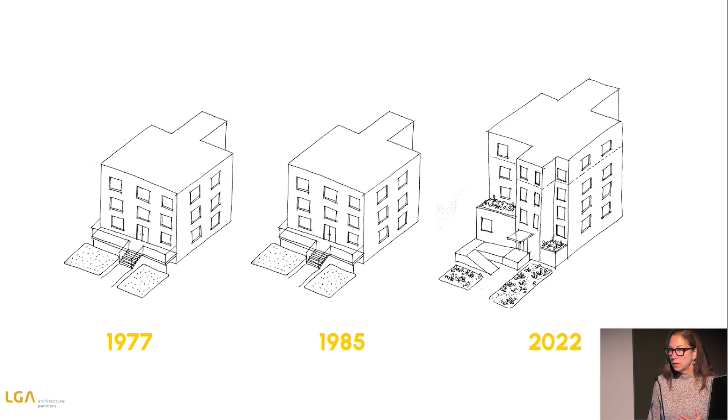What's really interesting is it's custom built in 1977. In 1985, the same architect is hired to do renovations of the interior of the box, but the box stays absolutely the same. Then in 2022, after the PNLT purchased it, we were hired to work with them, and that's the first time there are significant renovations, both to the box itself and to the interior, in a way that isn't just about maximizing the amount of units.

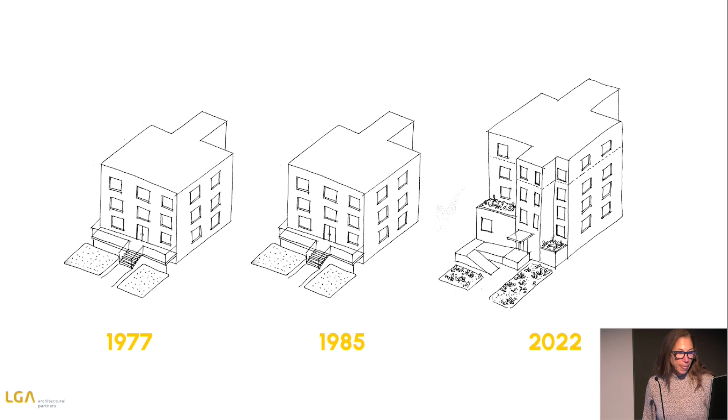So I just want to go through the history of this building, the history of the box, the history of the site. What's really interesting is in 1977 this was purpose-built as a 7-unit apartment, with 2 units per floor across 3.5 floors. The unit sizes were only 2 and 3 bedroom units, ranging between 900 and 1,260 square feet.

So that would be classified these days as upper middle class housing. I don't know if this was at the time, but this would have been pretty conventional housing in the mid-70s. Really interesting, in the middle of Parkdale, this was purpose built, private landlord.

So not a REIT because there were multiple investors, but still a real estate investor. You can see the two units, the blue and the gold.

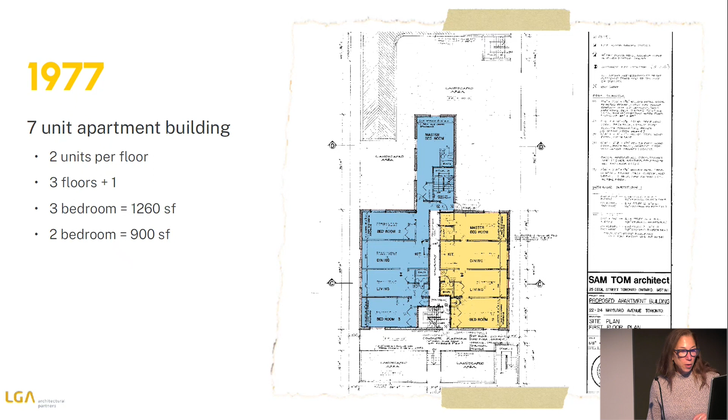Then in '85, the building owner hired the same architect to do an interior renovation, and basically that floor went from 2 units per floor to 9 units per floor. Each apartment became a bachelor, identical, about 230 square feet each.

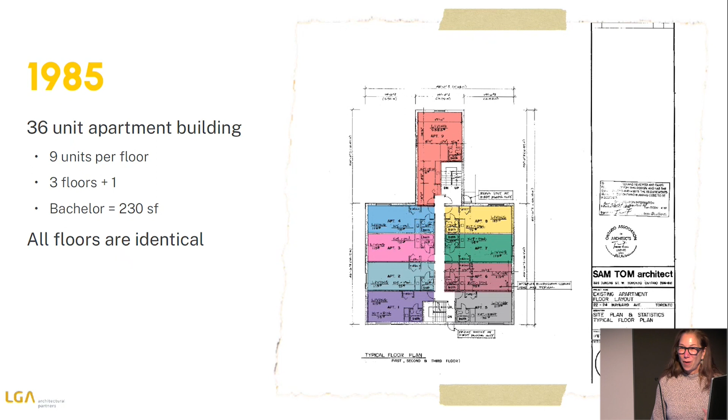We were talking before the presentation this evening, and it's really interesting - I don't have an answer yet about what were the external pressures or influences in Parkdale at that time that made it more profitable to go from 2 units of 2 and 3 bedrooms to 9 units of bachelor apartments. I think there's a really interesting story there, and it's part of the story of this kind of neutral box that becomes a reflection of bigger issues.

Then in 2022, we're working with Monica and her team at PNLT, and we went from 36 units to 45 units, and that was achieved by adding a 4th floor.

We kept the same number of units in the existing building, but on the 4th floor we were able to add barrier-free units. None of the existing units were, so we already get a kind of bump from an accessible perspective. And again, it's not just people with mobility issues, but say parents with kids in strollers that need an elevator. There was no elevator in the building.

It was a walk-up, 36-unit walk-up building. We added an elevator. We upgraded all of the existing apartments to make them function better as bachelor or single occupancies. We enhanced all the amenity spaces.

There was nothing like a landscaped front area, no ramp to get into the building, no mail room - all the kind of basics that you would expect in an apartment building. It had been there in the existing building, it had all been there. But when it was renovated into bachelors, all of that had been removed to maximize the bachelor units.

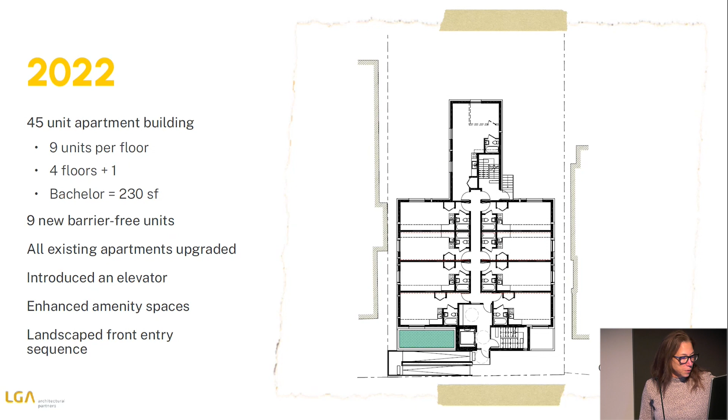So that's the rooftop unit. You can see it's just a mirror image of the floors below.

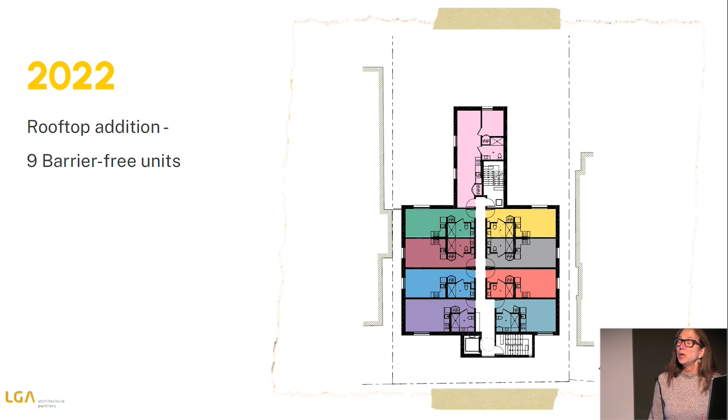This was as much a reflection about the constrained finances that PNLT has to do these projects. But again, it's also a reflection that this kind of unit can serve their public well - or rather, the community well. It doesn't serve all of them, but for some of them, this is totally fine.

And then the other thing that we did, because it's a land trust and there's an investment in long-term housing stock and long-term amenity of your experience living there, is there was real design work to try and figure out how to make these units function really well.

Not only in terms of having a flexible unit, but also investing in the knowledge of things like - well, you don't want a bar fridge in a bachelor unit because then the resident has to buy really expensive single serving meals. You want a full size fridge so they can buy bulk sizes and actually make something that's more affordable.

There's a lot of attention paid to the coordination so that everywhere you look in the apartment, there aren't miscellaneous bulkheads and all the things that you might see actually in a lot of condos. So there's a lot of work to make it really comfortable and pleasing.

And then we worked out a really good barrier-free unit - again, not things that would have happened in the sort of '85 renovation.

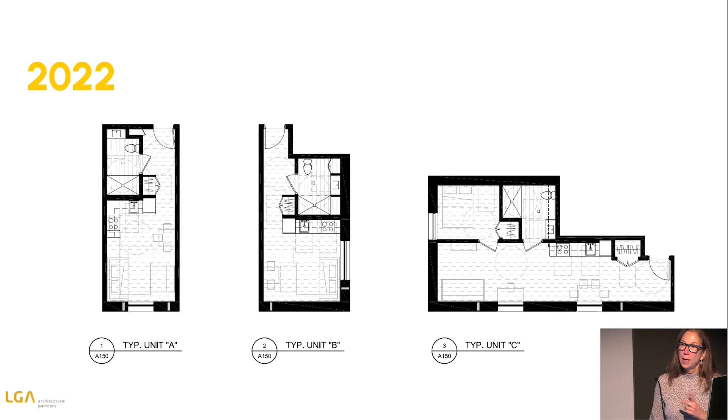And then a lot of work, the main work architecturally from a design perspective was in the front. So we had developed two options with PNLT, two ways to add on to the building to increase the accessibility, to increase the amenity, and to really augment the experience of walking along the street and entering your apartment building and making it respectful and enjoyable, which is really important.

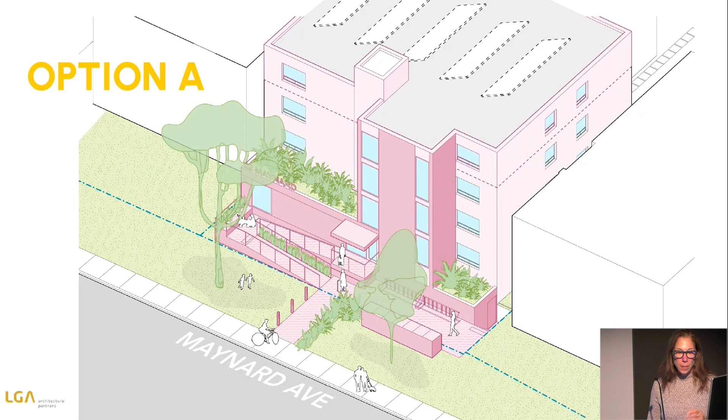So a lot of it has to do with landscaping, has to do with adding a ramp - not just a ramp that's the most utilitarian, but one that has generosity to it. And then we added, as I said, an elevator, a mail room, all the things that really make it work well.

And then the line at the top floor is where you can see the rooftop addition. And then there's a separate idea about an energy agenda. We're hoping to put in solar panels on the roof and make it function better. We're also going to change all the windows and insulate the building, which will reduce the energy costs, operating costs, and the operating carbon.

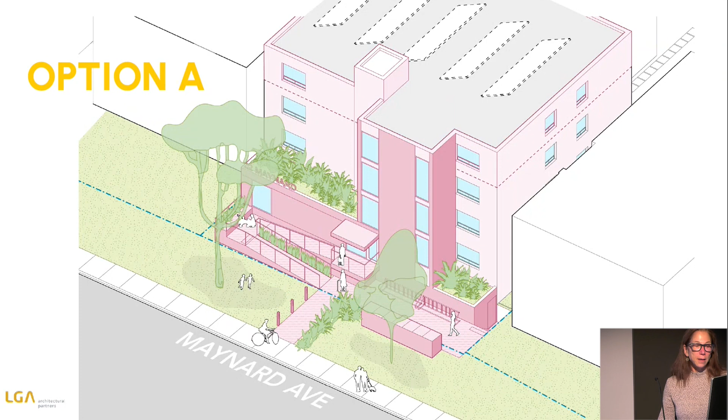So this was option A, and that was option B. In the end, we went with option A because adding that little bump at the front provided a significant increase in the utility of the building and the experience as a place where you could actually live longer term, because it had a generosity to the entrance. You could actually have a place to put your strollers, a place for storage, all those kinds of things.

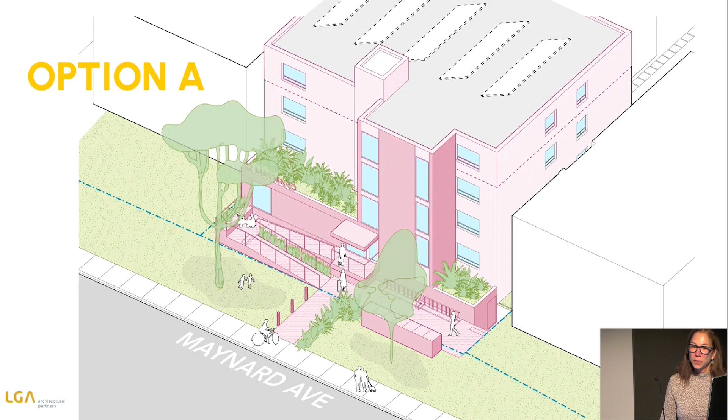And that's the end of the presentation. It's brief and small, but I think the ideas are the big ideas. Thanks.

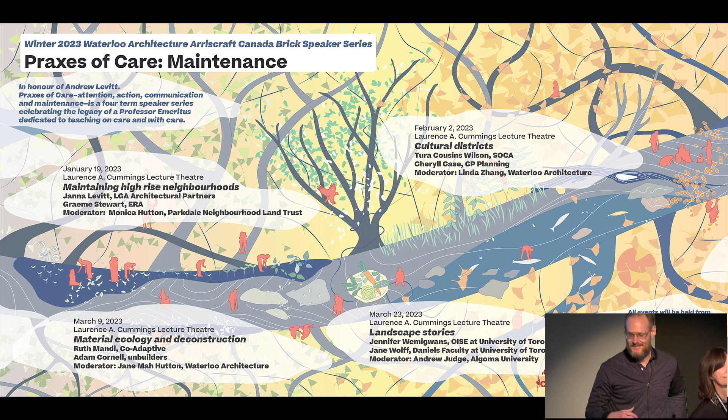Thanks, Janna, and thanks everyone for having me. It's a real pleasure to be here. It's great to see some colleagues, some familiar faces, and some faces I haven't seen in a while. The theme is perfect in terms of the work that we do and the type of things that our practices together take on.

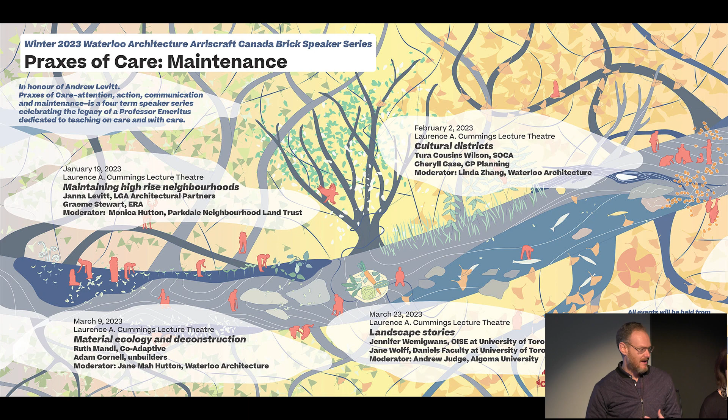The idea of care and maintenance is really a different ethos. It's interesting that we're now at a moment where ideas of care and maintenance, and looking at what we have, have become so topical and important, where I think it's been quite a fringe issue, in many ways seen as secondary compared to flashy new buildings. But more and more, the expertise required to deal with our existing building stock is critical, for all the reasons we know: the climate crisis, the housing crisis, all the compounding crises we're tackling. I'm going to provide a broader overview of some of the big policy pieces we're looking at, and then a few case study projects, and look forward to jumping into the Q&A.

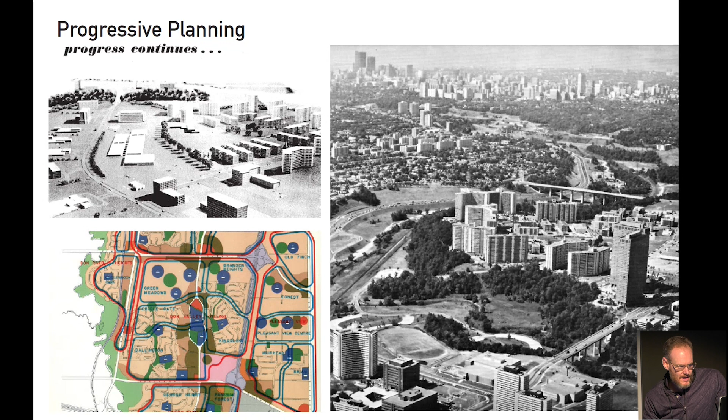A lot of the work that my practice focuses on, and that Janna's practice focuses on, is really this era of housing. A lot of the work I did as a student with Adrian and others was digging into where this came from. Why is it that Southern Ontario has a remarkably robust legacy of this type of housing, with big projects, big thinking, big capital-P planning, in a way that's simply different from how other comparable urban regions grew? If you look at San Francisco, Philadelphia, Dallas, Houston, Atlanta, you don't see this. This is completely bespoke to the Toronto region, but really Southern Ontario and beyond. You see it across the country, and there's a whole bunch of reasons for that — that's a whole other lecture, but we can talk about the different parts to it.

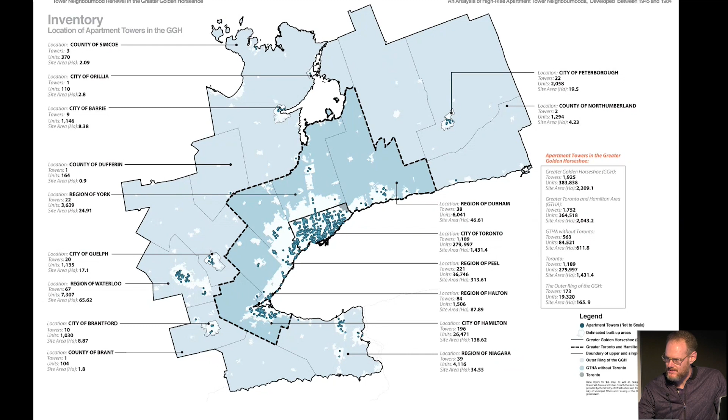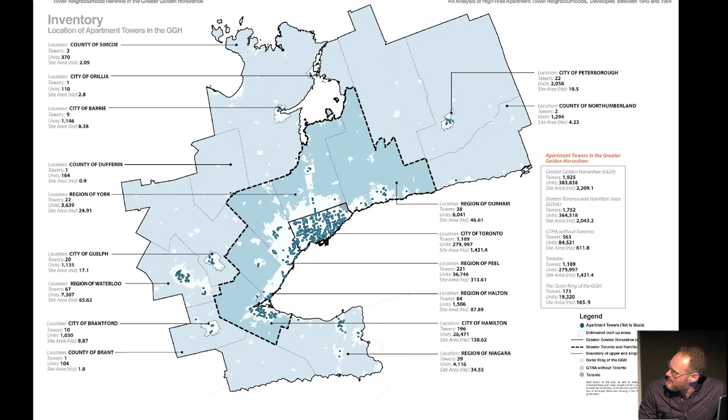A lot of our practice has been doing the bean counting to understand this — how do we understand the place we live? Where are people housed? How are they housed? Who's housing them? This is a map we put together for the province of Ontario about 12 years ago, and it was the first time there was really an accounting of all these types of buildings, these legacy towers. We found 2,000 of them in the Greater Golden Horseshoe, which includes where we are today.

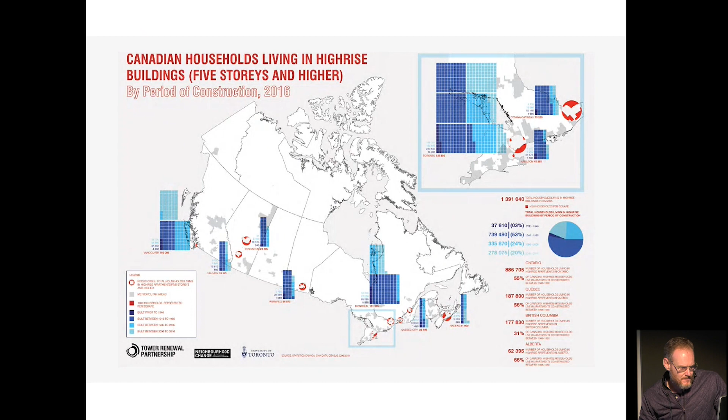Beyond that, with later work with StatsCan and others, we found a huge supply of this type of housing — high-rise housing across the country. We found that even with all the condo booms we've had, more people still live in housing built in the 60s and 70s than in all the condos we've built today. It was an extraordinary housing boom. As many people know, this legacy housing is in many ways at the end of its life, so we're at a crossroads of how do we reinvest in this housing — we certainly can't lose it.

If we don't have that standard of maintenance and standard of care, there will be disasters. This is the disaster that happened in a building on Parliament in Toronto, and St. Jamestown, where because of an electrical fire, over 1,000 people became homeless overnight, and they weren't able to come back to their flats for 18 months. That one building put so much pressure on the housing system that the mayor had to put people up in motels, and it was all over the news a few years ago.

That was one building. What happens if 2 buildings go down? What happens if 10 buildings go down? We don't have the flex in our housing system to address it. So it's absolutely critical that we find solutions.

The other thing we can't do is this, for a whole bunch of reasons. Right now there's a real discourse around embodied carbon, but also the fact of embodied housing. You don't want to lose the housing that already exists.

That's been a lot of my work over the last 15 years or so, and I've built a really great coalition that includes a lot of people in this room, to figure out how we move this forward with all different parties and partners through the Tower Renewal Partnership. The broad set of ideas is: let's keep what we have, let's value what we have, and then how do we optimize it through different forms of investment in the fabric of the buildings and the lands around it.

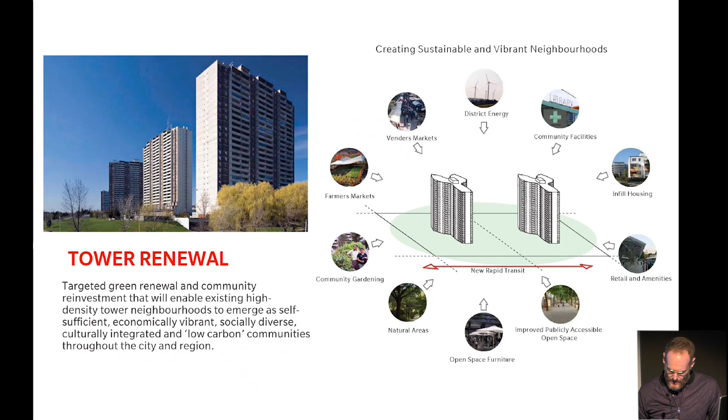Really looking at building maintenance for deep energy retrofits, but really for comfort and health, improving the social and economic life around the buildings, and then neighborhood transformations, with new housing and more housing where appropriate.

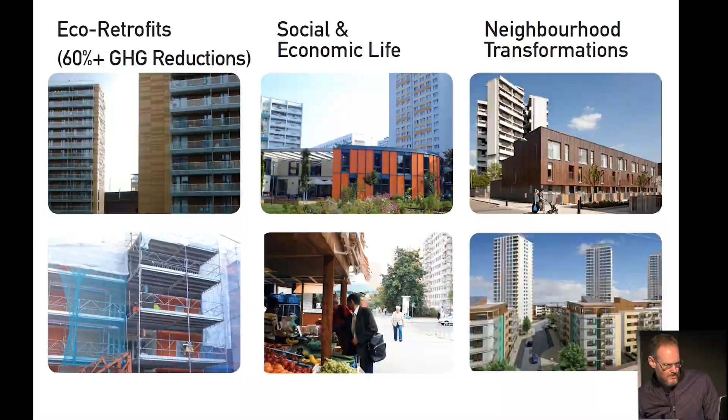One of the early wins, about 8 years ago or so, is we worked with the United Way, Toronto Public Health, and a bunch of other groups to liberalize land use in a lot of these tower neighborhoods, because not by design, but just by practice, they were all single-use zoned as residential, which means if people wanted to open a small business or do modest things that we all know make our neighborhoods grow, they weren't technically allowed to. Landlords, being conservative and their lawyers telling them what they would tell them, were suppressing a lot of that activity. So we were able to get consensus from the city to do a citywide rezoning.

We rezoned about 500 sites. The argument we had to make is that in a new condo, the city mandated that level of flexibility, but in older apartments it was technically non-conforming. So there was just an asymmetry, and to make that happen it took a lot of work, getting it through committee, doing all the political work. This was during the Rob Ford years, so it was an interesting time at City Hall.

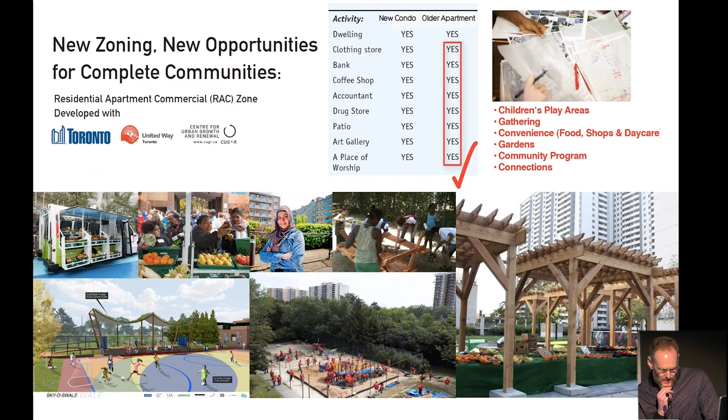But what that allowed for was they were suddenly working with NGOs, working with community groups like FoodShare and others, to be able to have all these interesting things happen on these parcels.

This is some projects we were directly involved in, working with youth to reimagine parking lots and underused areas. This is in Thorncliffe Park, where the Thorncliffe Park Women's Committee worked to put on these amazing nighttime bazaars that a lot of you have probably been a part of.

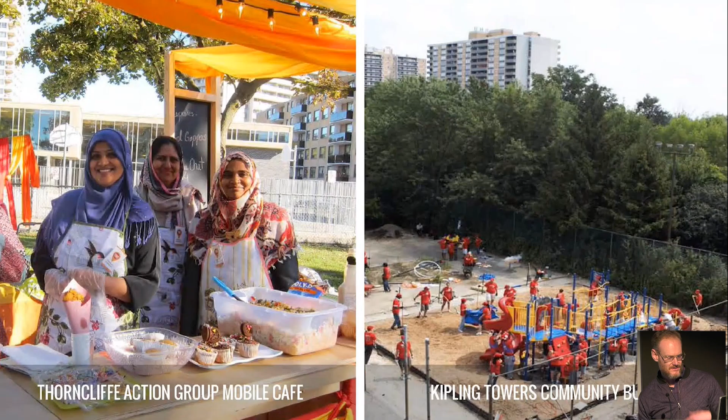This is a group we worked with, designing modular furniture so they could set up this pop-up bazaar and then store it in their building. And then it began to expand and take on new forms.

This is a project where we were able to get a new daycare on a TCH site using this new zoning, where we didn't have to go for site plan approval and didn't have to do a rezoning. So that was just as of right, using it to be able to do something, which was really fabulous.

We worked with SVN Architects as partners on that.

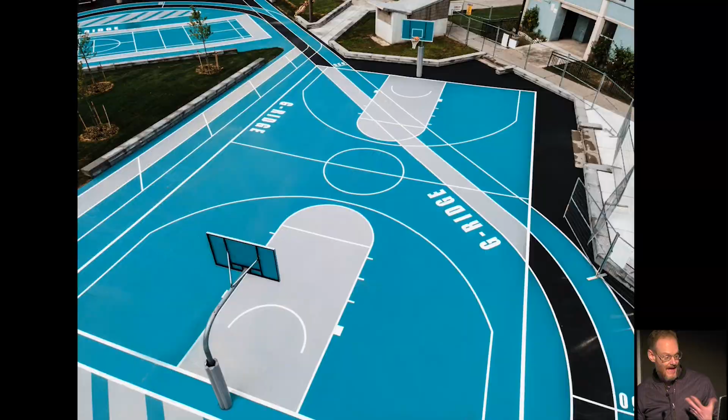This is one that we completed with our chief landscape architect at the office who led it. It was with Toronto Community Housing and a grant from Toronto Maple Leaf Sports and Entertainment. We designed this with the kids, and when it opened, the Raptors came and everyone had a wonderful time. But it was also about taking something that was a really underused asset and turning it into this multi-purpose landscape.

It's great to see these types of things happening as these aggregate pieces, and there's lots more to do. But the big hurdle to getting that going was to change policy, and that took several years of pushing a boulder up a hill.

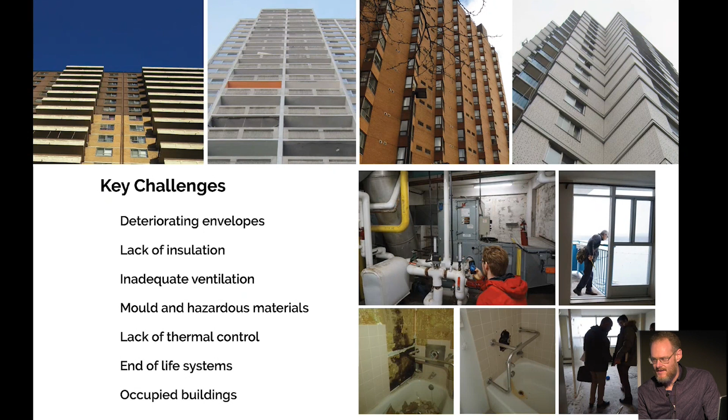The next piece of this is physical building retrofit, looking at these buildings like cruise ships. They're usually made of the same stuff, they have the same equipment, and they're all aging at different rates. The projects we've generally been involved in have very distressed assets, buildings at the very end of their life that have had very little maintenance, and it's a major job to bring them back. Then, in addition to maintenance, how do we make them performative?

A lot of the work the market is doing is around 10% GHG savings from things like changing light bulbs and having efficient boilers. Our ambition was, can we get to near net zero or around there? And what would that take?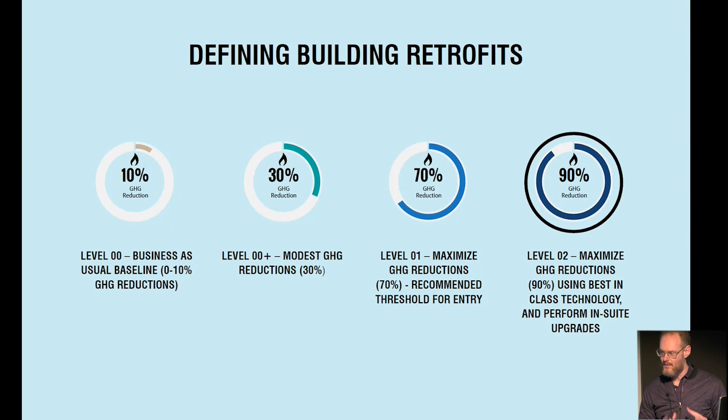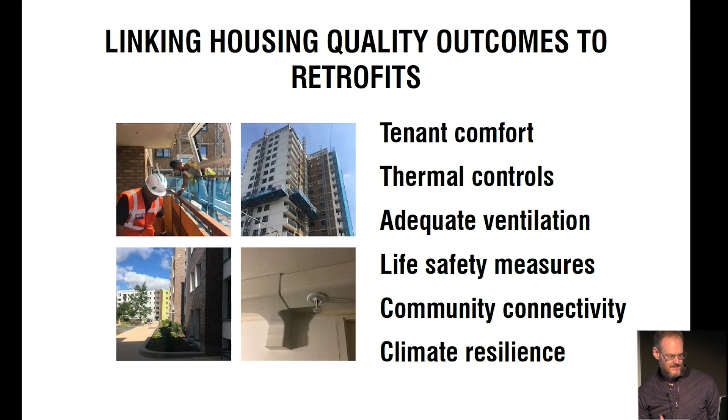And how does that also map onto the really important stuff? There's a real focus on energy. Energy is crucial, I'm a big advocate of that, but as a practitioner I also know you can make a low energy building that's terrible to live in. So you have to make sure it's actually comfort-driven: tenant comfort, thermal controls, adequate ventilation, life safety, community resilience, et cetera. Low energy is a corollary of it being performative.

To bring this all together, you need financing, you need standards for what standard we're engaging in a retrofit, and you need a ready industry that can say, we know how to build this. All three of these things are moving along, and as one moves forward the others catch up. We're not at a point where it's totally singing, but we're much further than we were a decade ago.

I think the standard part is really key. There's very little guidance on existing buildings, so when you're dealing with one it's a lot of professional judgment in terms of what you're doing and to what level. What got this going was first provincial funding, before Doug Ford, to invest in these buildings, which really primed the pump for the first generation of these deep retrofits.

Then came the National Housing Strategy. I'm a little disappointed with some aspects of it, but there really was a promise to invest billions of dollars in retrofit, and some of that has led to exemplar projects, to the point where we're well past the pilot stage. These are projects from Nova Scotia to Quebec to BC to Ontario, and there's an Alberta project too. So this is literally a coast-to-coast example of ambitious housing retrofit projects enabled largely through different forms of federal funding.

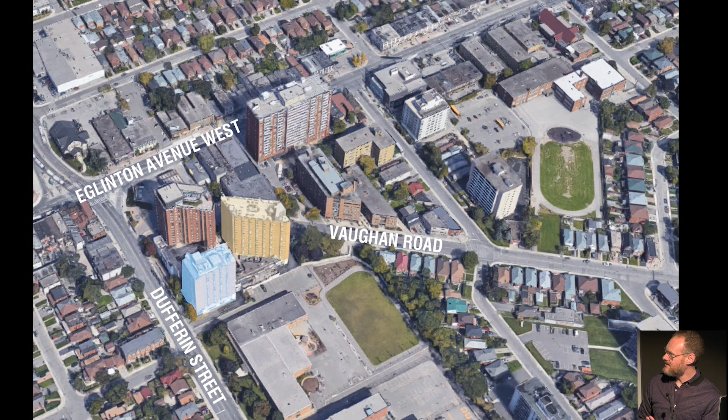And it's, I think, a huge win. This is seniors housing, very similar to the project with the modest units, because it's bachelors for vulnerable seniors, and thank goodness it has stayed in the system.

We went through the process. This is what it was like when we got involved. Some of the floors were completely empty, and the reason was it became a downward cycle: as people left, the units were in such bad shape, they didn't have enough money to fix them, so they stopped renting them, so rent revenues went lower, and so on, until the building was almost empty.

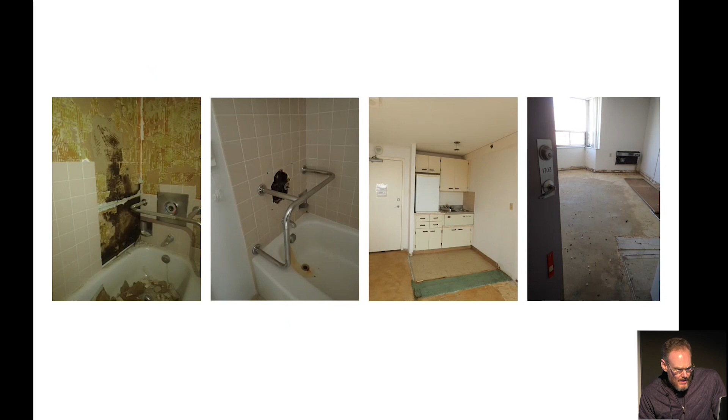I think there was about 30% occupancy when we were involved. So we really looked at this with the anchor funding from CMHC to bring them up for accessibility, and for aging in place. We needed a 30% energy reduction target. It was an electrically heated building, so that was actually quite difficult, but we were able to achieve it.

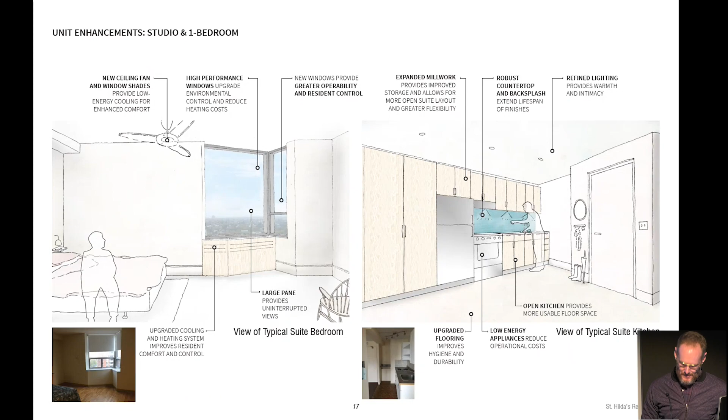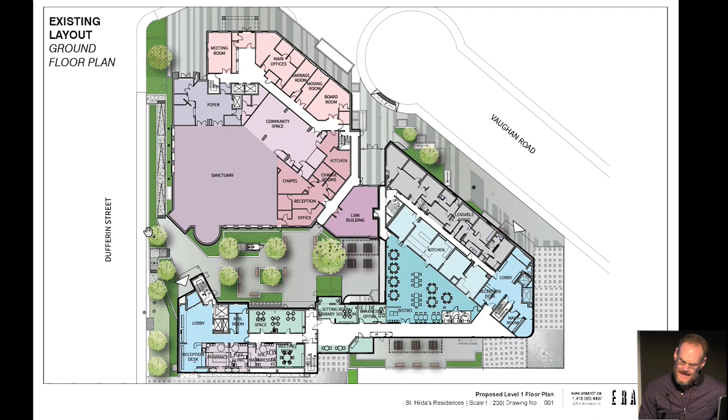And then this is the campus. There's this amazing campus, and there's this real ambition as a next stage to build a community hub, and to work with the city to make this, and a lot of the unused space, a focal point of the Fairbank neighborhood, which has a real need for different forms of spaces.

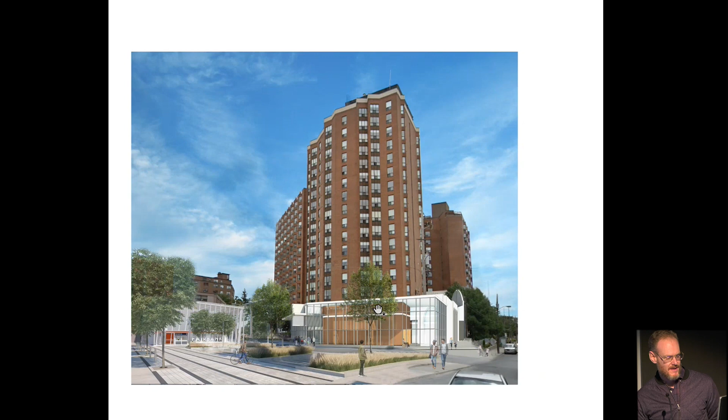This is the new Fairbank station, which is kind of amazing. This used to be a gas station, now it's a plaza. And the next phase is, how does it become both a community hub and retail facing that station?

And then this is the gang. This is the board who we meet with weekly. And this gentleman here really had the vision that kept this affordable, and was able to bring these partners together.

Next, what I'm showing is more of a project management thing, but this is what it takes to take a project that's over 5 years and figure out this rolling way that you're finding funding, getting approval, and making it happen.

These are the types of project plans we have to put together in terms of pre-design, the usual pieces you do as an architect, but then tying it into the different funding streams and funder requirements. If you have 4 or 5 funders, you have to meet those requirements through different reporting, which may be asynchronous, so there's a lot of work as a practitioner to bring this all together to make a project like this happen. A lot of balls in the air.

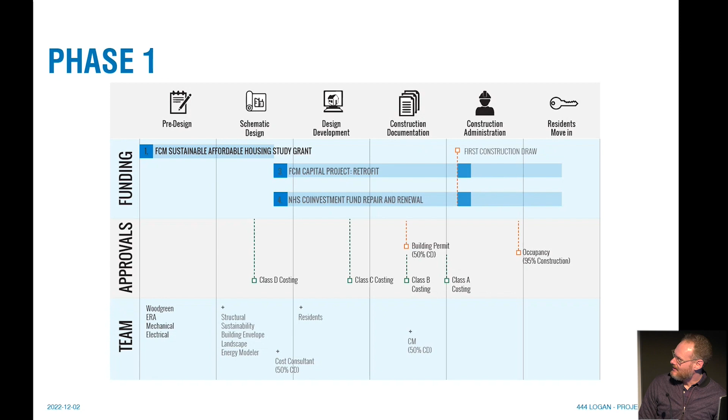So that would be phase 1, and then you have phase 2, and they stack, and then if you bring in phase 3, you have to bring this all together. A lot of it is not just being an architect in the traditional way, but also being someone who can organize a project like this and bring it to a client who can access that funding stream, or other parties who could be a partner in it.

I would say that we're in an amazing moment where there's such a focus on housing. There is funding out there, and in our experience, it really is the nonprofits, municipal or private, who are the real leaders and innovators.

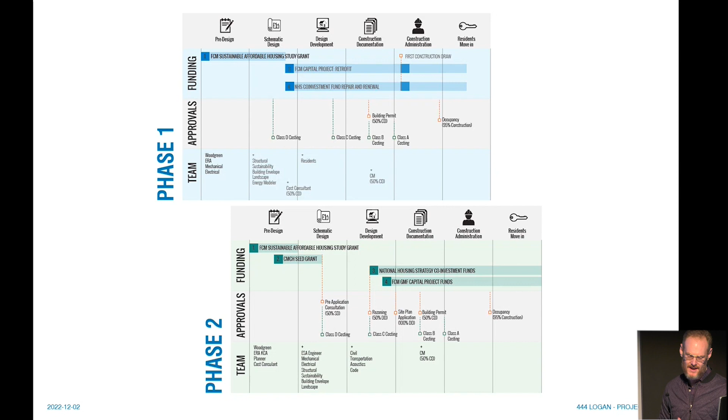The private sector are laggards in this. They are not meeting the same energy targets. They are not doing this type of deep retrofit. It really is the nonprofit sector who's leading.

And then this gets into the next project, which is the Ken Soble Tower in Hamilton, which was about five years of the team full throttle on this, in a really similar way, where it wasn't just the design of the building, it was the design of all of the ways that we were able to make this project happen. It was built in 1967. It was a centennial project. And I think what's kind of amazing about it is...

It takes leadership, and it takes, I would sort of say—I wouldn't want to say it to the face of our clients—but it takes a certain amount of irrationality, because the people taking these projects on have such a vision and are taking risks, and they believe in this work. It's highly risky because they're doing these new things, but you need that level of risk taking to do something amazing.

So Tom Hunter was the CEO of City Housing Hamilton. He's now moved on to be the CEO of Toronto Seniors Housing. He's an amazing guy—his background is healthcare. So he came from a healthcare background, became CEO of a housing company, and he said, I've been part of building world-class hospitals in Canada. Why do we have absolutely appalling housing?

So his goal was to modernize Hamilton City Housing, so that their entire stream of new builds—and they've got about 4 or 5 underway now—would all be passive house standard, because he was convinced that was the best standard to work with. And this project, their first retrofit project, would also meet passive house standard. So we were brought on to meet that challenge, and that was a challenge we were very excited about.

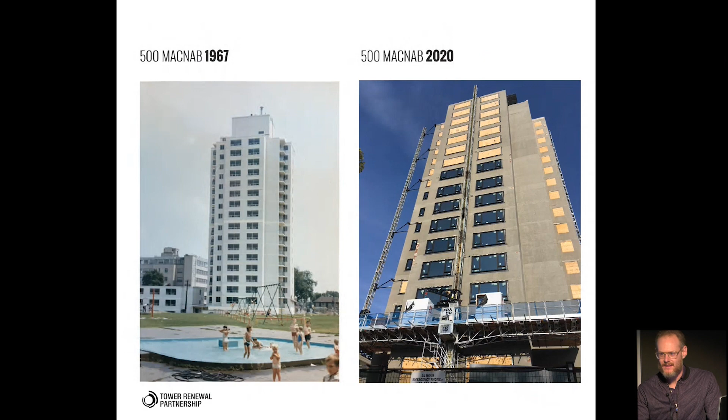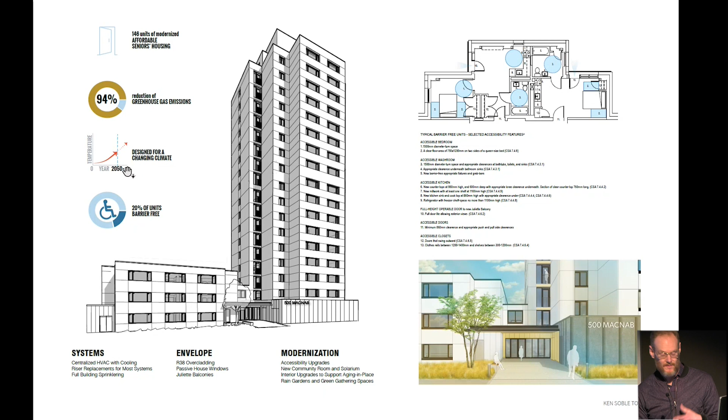And so that was the mandate the CEO got, and we were thankfully able to be the ones to bring it to life. The mandate was 94% energy or GHG reductions, converting 20% of the units to fully barrier-free. And we modeled it on 2050 climate data to figure out how we keep this place comfortable as we get much hotter and much more humid moving forward.

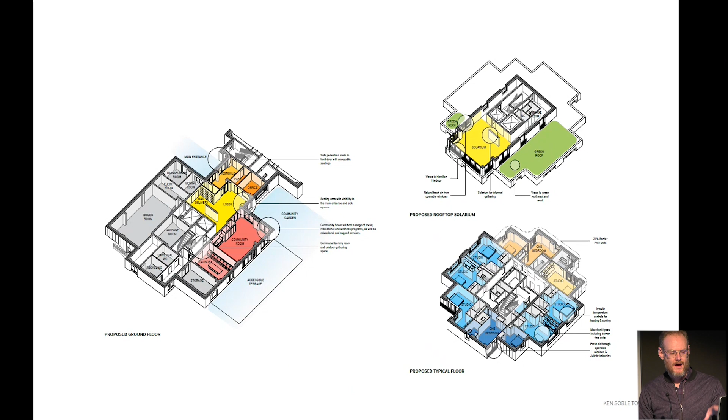We did some modest retooling of some of the common spaces—we didn't do any additions, it was all just working within it, but with the idea of aging in place in mind. This was not originally purpose-built as seniors housing, so that became its new life.

Jen, I'm sure you're familiar with these, where you have to go to your funder and prove how you're doing it. What's interesting is there are about 3 or 4 standards you need to meet that all go well beyond the OBC. So through this, it's great to say it's not just about a wheelchair radius—it's about all these other issues of aging in place and general accessibility as you're doing it.

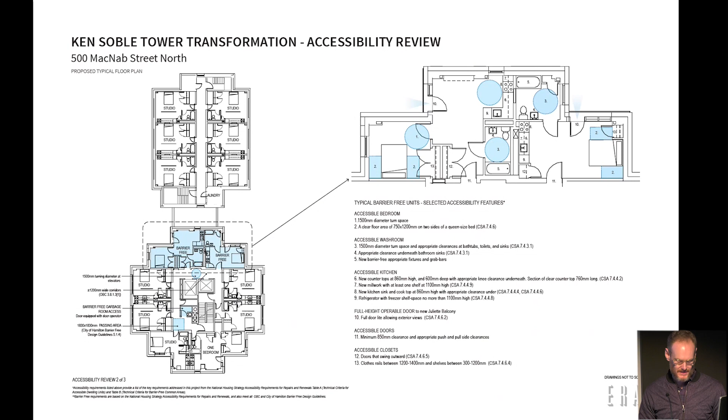Doing it within the confines of a concrete building is very difficult, so this was major surgery. In the units that we made barrier-free, it looked like this.

What you can also see is fully new plumbing risers. This is new direct fresh air being brought into each unit. So this is a complete asset renewal, which you can only really do in an empty building.

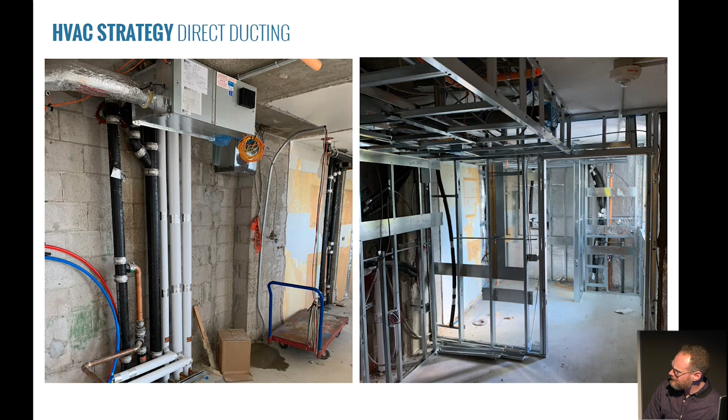These are the little studios. These are all the compounding set of issues. Some of them are remarkable. When we took the drywall out to do some plumbing work, we found out that it was Swiss cheese between the fire barriers between units.

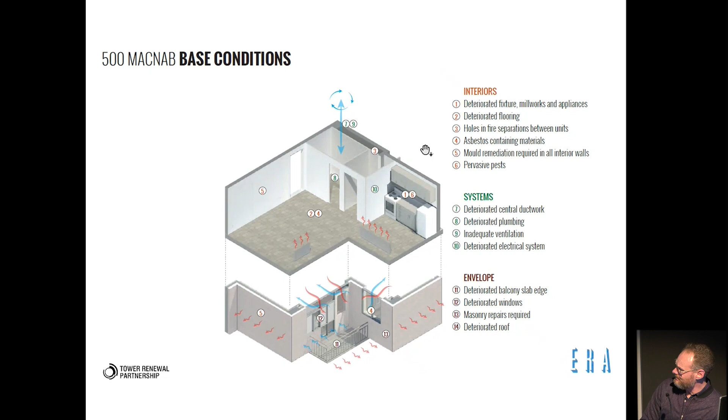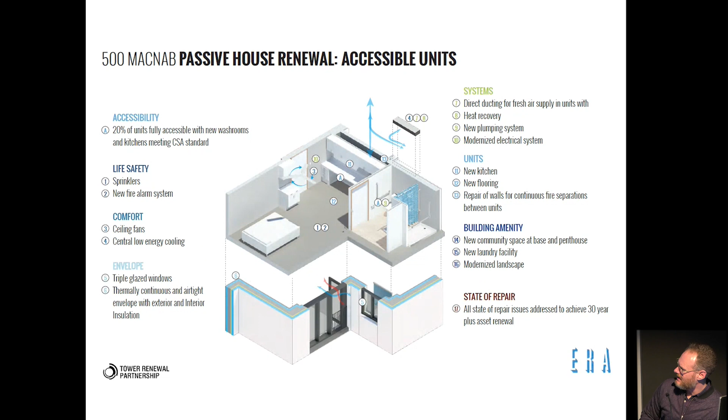So those all had to be fixed. And so this is what it looks like afterwards, a winter coat on the envelope, passive house windows, new ventilation systems, new finishes, et cetera. And then this is the kind of twisting around where the kitchens and washrooms were for the barrier-free suites, to make that all happen.

So this is what sort of the end result looks like. Very pleased with how this turned out. It's fully occupied now, going from a building that was providing zero housing to a building that's providing 150 flats to people in need.

The other piece about it, which is really interesting, was ventilation and some of these issues around health and comfort. So we insisted that the building be sprinklered. After the Grenfell tragedy, you have to have adequate fire suppression in these buildings. Thankfully, the client agreed. The other thing was we really proposed a best-in-class ventilation system, because all the evidence says these buildings have really poor air quality due to migration of things going through the buildings.

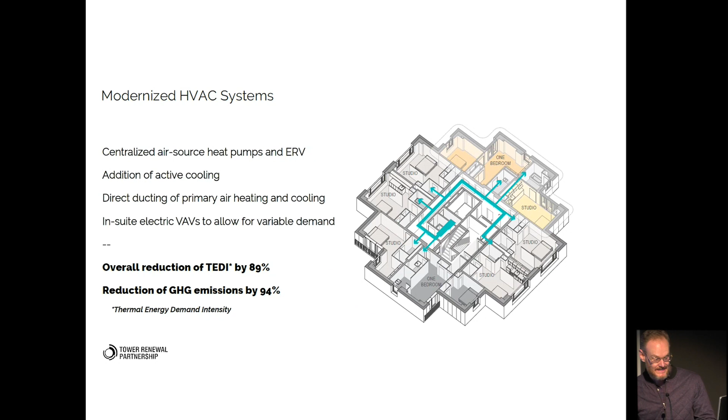And thank goodness we did, because this was designed pre-COVID, but the construction was in the middle of COVID. This thing was under construction, and because of the ventilation strategy we took, direct fresh air into each unit, it was able to be occupied during the height of the pandemic, because it met all of the ASHRAE COVID standards, which didn't exist at the time. And then this is just some of the studies you get into when you're doing this.

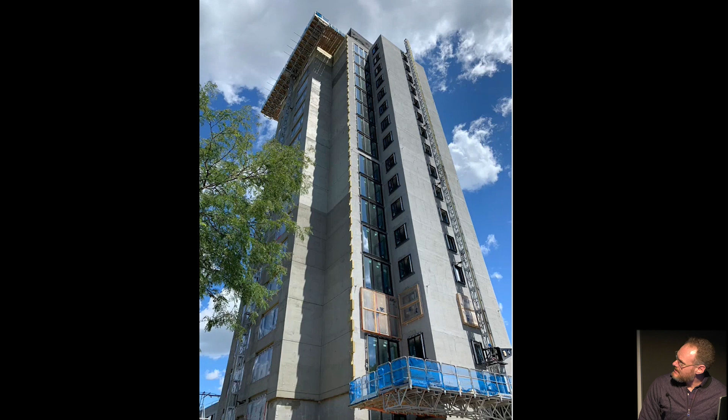This is what it looked like during construction, putting in the fancy windows, doing all the kind of air testing and all those things. And this is the final result.

But the reason you get into all these technical pieces is it's really about how do you ensure that someone is comfortable at all exposures during all these peak weather events. And there's more and more of these peak weather events that we know we're going to be facing.

That would happen within one day of an OBC building, but with this building, it would take up to 4 or 5 days. So you can sort of shelter in place even if the power goes out, because of the robustness of the envelope and that type of thing. So these are the things we need to start designing to.

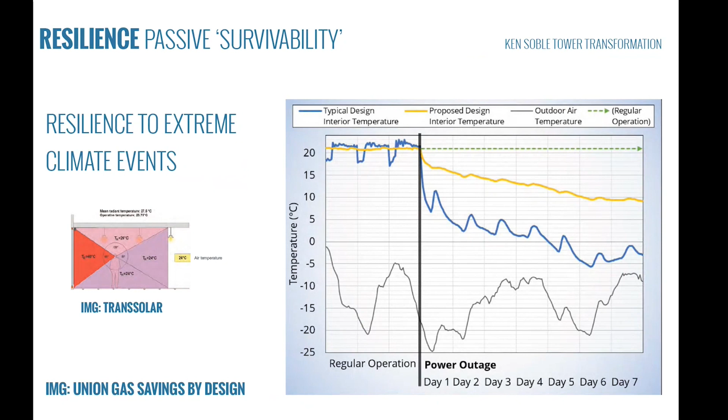So, just to wrap up, we're working with U of T Civil Engineering on a 2-year longitudinal study to really do a whole series of tenant interviews, both social science and civil engineering around performance, to say what did we learn, what worked, what didn't, how are we open source about this. Because this was a major federal investment, the goal of a project like this is to prove it's possible, and let's start scaling it. And what did we learn? So I will stop there and let's dive into conversation.